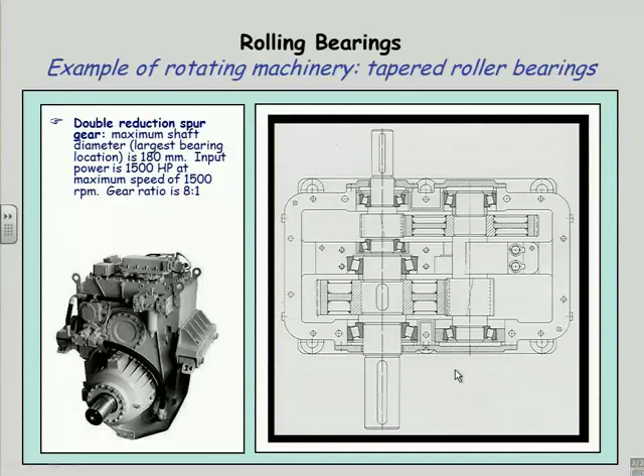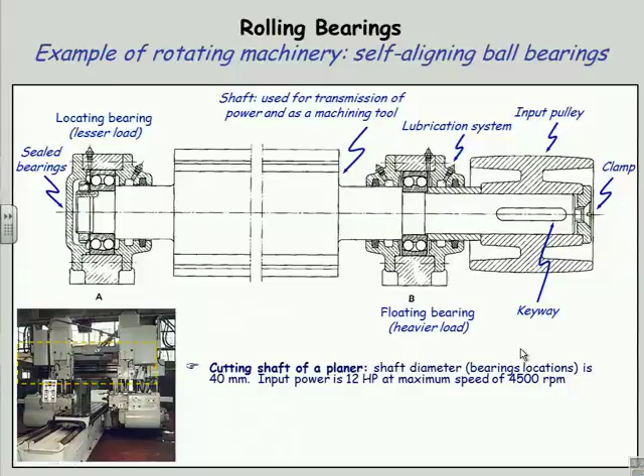So in that respect, they're handy because they're an off-the-shelf item. They're not terribly expensive considering the technology that's involved, because they make them by the millions, and they've invested a lot of machinery in the manufacturing process, so they're fairly inexpensive. They're made by a wide variety of manufacturers all over the world, and they're made to international standards, which means that any manufacturer's bearing of the same category is interchangeable with anybody else's, so you're not locked into any particular manufacturer. Same as with gears.

So ball and roller are the general types, and within those two general categories there's a whole big variety. For example, here we have this category of radial ball bearings, radial meaning that they're going to take radial loads and not very much thrust load, if any. Then there are those that are made specifically to take thrust. Then you have roller types, which can be either radial or thrust or some combination thereof. Here's that tapered roller that will take both side loads, that's thrust loads, and radial loads.

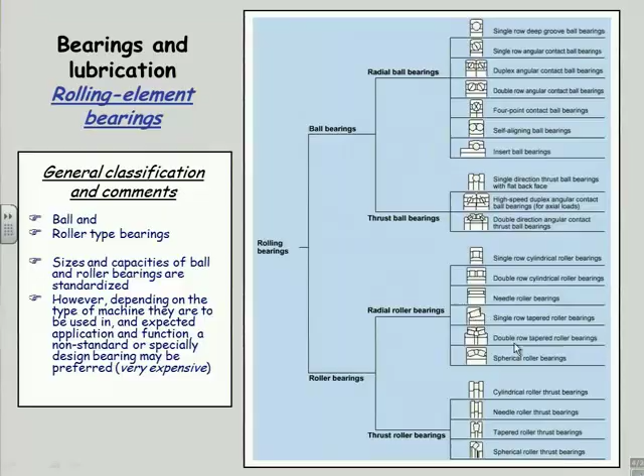So these are some closer views of ball bearings. On the left is a so-called deep groove ball bearing. It's also called a Conrad type. It's the most commonly used. It has the highest speed capability of any of these types of bearings. You'll notice that there are grooves that match the radius of the ball for some portion of it, both on the outer and the inner ring.

Everything here is hardened steel. They use a high chromium steel for both the races and the balls to get good life and handle large loads. These balls are in some kind of a cage that separates them and keeps them located appropriately around the circumference, and the balls do not rub on one another, so there's airspace between the balls maintained by the cage. And because there is this little bit of a wraparound, this bearing can take some thrust load as well as radial, but they're primarily designed for radial load. And they can take thrust in both directions.

The so-called angular contact ball bearing, you'll notice, only has a wraparound on one side of the ball, on this side on the outer ring and the opposite side on the inner ring. So that can obviously only take thrust on the outer ring to the right and not in the other direction. And also, of course, can take radial load. So it says over here, deep groove, which is the one on the left, are selected for radial and moderate thrust or axial load. Angular contact are selected for radial load and larger thrust axial in one direction. So there's more wraparound apparently here on the ball that lets that take a larger thrust load, but only in one direction.

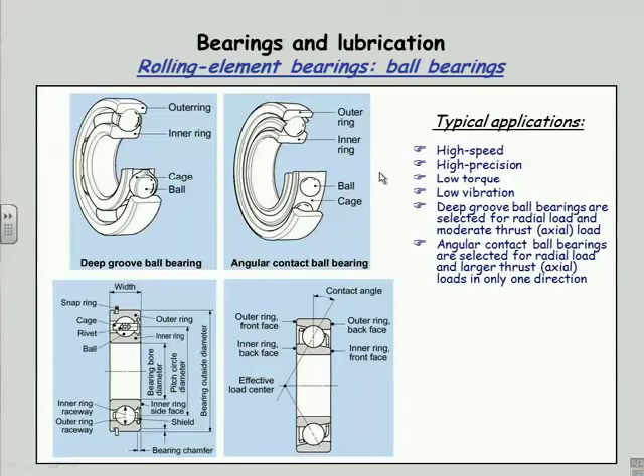Here's the tapered roller again, a conical shaped roller arranged so that it can take both directions of load. Another nice feature of the tapered roller is it's separable. So I can pull it apart and have the outer race in one hand and the inner race in the other. And the rollers will be attached, I think, to the inner race, usually, and the outer race is just the race. Whereas ball bearings, typically, you can't take apart, or you'll ruin them if you do, because they're crimped together. And likewise, this type of spherical roller bearing, you would not be able to disassemble.

So they're made to be pressed on the shaft and into the hole. So the bearings are made with very tight tolerances on the OD and ID, suitable for press fit, which makes them easy to put in and hard to get out, as you might imagine. So quite often you will press only on one or the other, press it on the shaft, and you'll clamp it in. I'll show you some clamping arrangements later on the other side. So I have some means of disassembly for replacement purposes.

This spherical roller will give me some self-alignment capability, which is nice. Most of these bearings will require you to have very accurate alignment of your shaft holes so you don't put side loads on the shaft and bending moments. But there are some, such as this spherical roller, designed so that the outer race can rock with respect to the inner race and self-align. And those are nice because I know I have simple support at the load then, since it can't take a moment, right?

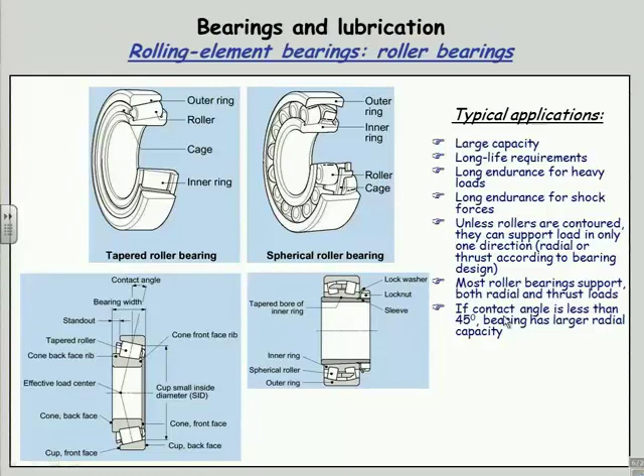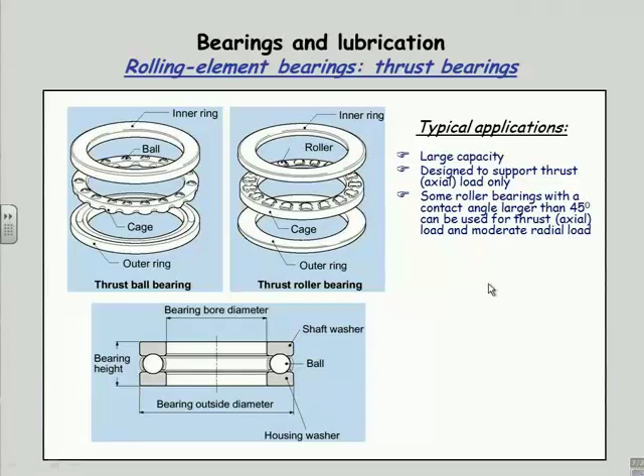Then if I have strictly a thrust load, there are two possibilities here. This shows a ball thrust bearing. Again, the balls are captive in some kind of a container called a cage. And we have an inner and an outer ring, which are really a top and bottom in this case. And this is a roller version of the same thing, a thrust roller bearing. And these will have more friction because, as you can picture, if this is a cylindrical roller, it cannot have zero slip except along one line because I've got a different linear velocity as the radius changes. So there's going to be some sliding going on here, whereas the ball has point contact, so there's less sliding involved there. These will hold very large loads.

So this is a list of pros and cons for rolling versus sliding bearings. There's always a trade-off in some respect. So the rolling have advantage over the ones we talked about the other day, sliding or journal bearings. Very low starting friction. In fact, you're familiar with the Coulomb friction idea that there is a static component of friction that's larger than dynamic, and that's true whenever I have something sliding on something else. So that's a characteristic of a journal bearing. So it takes more torque to start it rolling than to keep it rolling. Whereas a ball type interface or a roller type interface, there's very little difference, almost immeasurable difference between the static and the dynamic friction. So they start up more easily than a sliding type bearing.

Interesting little tidbit as a side note is that around the turn of the 20th century, the late 19th, early 20th century, railroads switched from journal bearings in all the axles of the train cars to ball bearings. And long freight trains that originally required two engines to get them started because of the start friction could then be run with one engine. So it was a huge saving in fuel costs and so forth, and equipment being tied up, if you could run the same length train with one engine as opposed to two, just because they put ball bearings in all the axles.

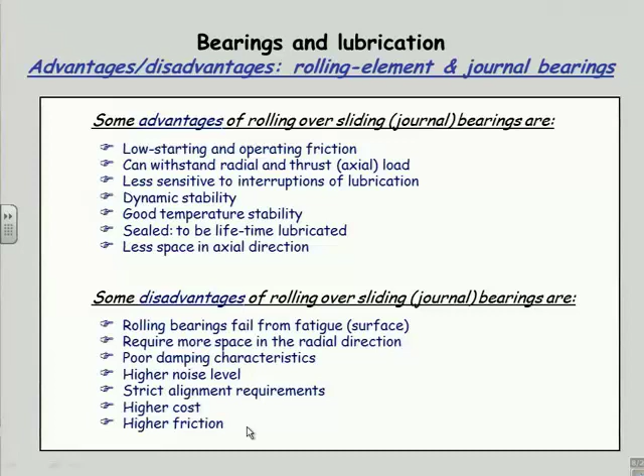Higher cost. It's pretty obvious that a slug of bronze is going to be less expensive than something with a bunch of balls in it. Higher friction. Because when I get up on that oil film, my friction coefficient drops very, very low, even lower than the rolling. We saw some of these in an earlier picture.

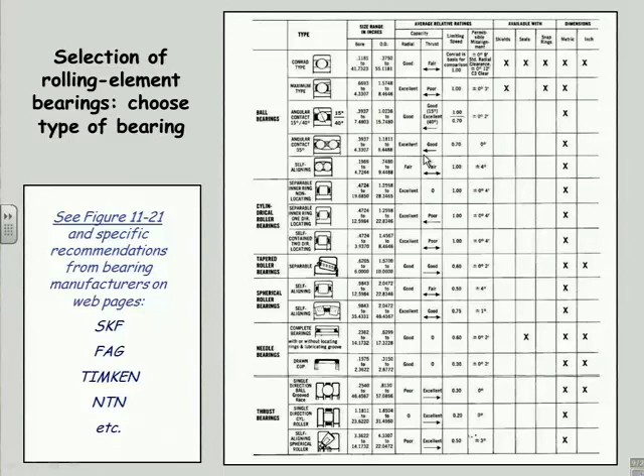This is a catalog page right out of a bearing company's catalog. And here are some of the big manufacturers, SKF. They seem to like initials, FAG, NTN, Timken, and there's a whole bunch more. So you can go to their catalogs, which are now all on web pages, and you can find out all the information you need to specify a bearing. Very rarely, unless you work for a bearing company, will you ever design a bearing. You'll simply select one from the available bearings, and we'll talk a bit today about how to select them properly. It's quite straightforward.

We know that in surface fatigue, it's eventually going to fail. It's only a question of how many cycles it takes to kill it. And this curve shows a statistical distribution, in essence, of the rate at which the bearings will fail in service. It's referred to as a life distribution curve. On the horizontal axis, we see something called relative fatigue life. And the reference life is this so-called L10 life, which is given a value of 1. And for a given bearing, that will be a certain number of cycles under a certain load.

And what it means is that you can expect that 10% of your bearings will fail in that many cycles, whatever this represents in an actual calculation. And 50% of them will fail at, say this turns out to be a year to make it easy to talk about. So say this is a year's worth of running. I'll lose 10% of them. In 5 years, I'll lose 50% because this is fairly linear right here. Then the curve goes nonlinear, so it'll take me 10 years to lose 80% of them, 15 years to lose 90% of them, and 20 years to lose almost all of them, like all but 5% of them, or something like that.

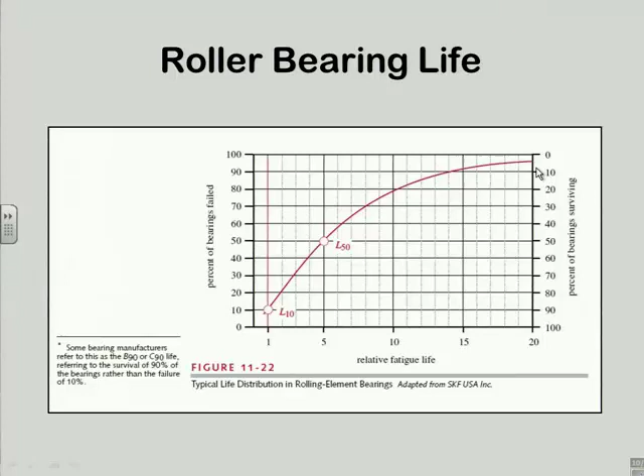So the L10 life numbers are used as the reference, and that's what you'll find in the bearing catalog. And with a very simple formula, we can calculate for our load how many of these L10 lifetimes we should expect. In other words, where are we on this picture here in terms of number of cycles? That's pretty straightforward to do. This is the relationship that's been determined by experimental data done by the bearing companies in large part. And it's slightly different for ball and roller. L in this case is the fatigue life measured in millions of revolutions.

C is a dynamic load rating, which is a number in pounds that is assigned to each bearing based on experiment and testing that they've done. So each different size and type of bearing will have a different number for C. And P is the load that you're going to apply to the bearing, whether it be radial or axial. This allows me to combine the two. So this is the equivalent applied load. And if I have a combination of axial and radial load, then this equation will let me find what P is for the given combination, where FR is the radial load that I'm applying, FA is the thrust load that I'm applying, and these factors X and Y also come out of a chart supplied by the manufacturer along with this factor C.

So I can look up the X, the Y, and the C, and V is the rotation factor, which is 1 if the inner race is turning and something a little bit bigger, I think, if the outer race is turning. So the reference is for inner race to be turning. And that's about it. So I can get a number for P based on my applied loads.

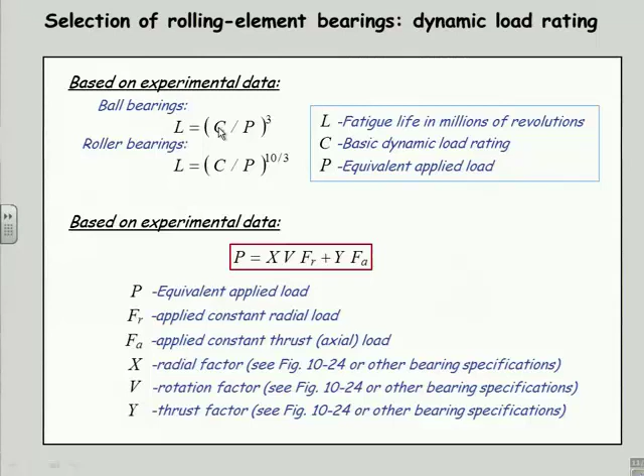Now, fairly recently, I didn't put a year on this, but this is only in, I think, the current revision of the book, so it's only a few years old, ASME and some other researchers have come up with a new standard. It's both an ISO standard and an ASME standard for rolling bearing life. And what's happened is there's been something of a revolution in steel manufacturing over the past couple of decades.

And they've discovered how to make what they call clean steels. And by clean steel, what they mean is they've controlled the process to such a degree that they are keeping the debris, the crud, out of the steel. And it's the non-steel components in the steel, that is pieces of dirt or little gaps, that cause the cracks to begin forming. The cracks will start forming at one of these disruptions.

So if you could somehow make a piece of steel that had no defects and no foreign material in it, then you theoretically would have a much stronger material, and it turns out that you can approach infinite life in surface fatigue with these special clean steels. So, as I underline here, it makes use of the latest empirical data on the surface fatigue strength of bearing steels. And these are being applied particularly to bearings where you're trying to get longer life.

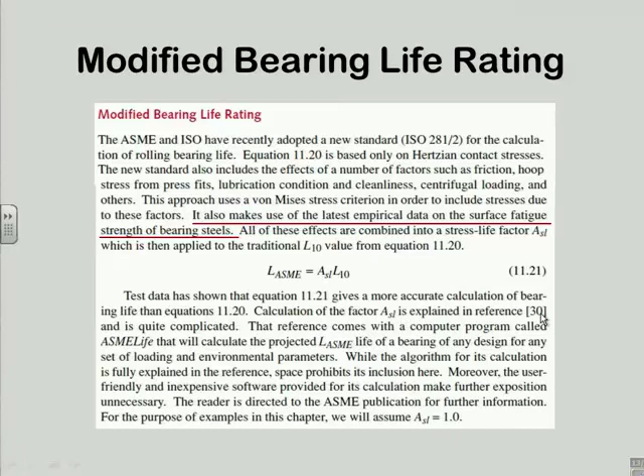And it says here, ASME has published this in the reference that I give you in number 30, and it's a very complicated algorithm, but it comes with a computer program called ASME Life that calculates this number for you for any set of loading and environmental parameters. They explain the algorithm, but it's rather complex, so I didn't even try to include it. But if you get the software package, you don't need the algorithm. So for the purposes of my chapter, I've just considered this factor to be one. And you can go to that reference and pay them a small amount of money and get that program to do more accurate calculations if you would like to do that.

This is an example that I have in the chapter. I'll just walk you through it. It says we want to select a deep groove ball bearing for a certain loading and life. Now in your case for your project, you've got mainly thrust load, I think, right?

You've got the weight of all that stuff sitting on at least one of your two bearings, right, to support the weight of the dial. And you don't have an awful lot of radial load, I don't think, because you're mainly transmitting torque. And unless things are out of balance, which they don't want to be, up top, I should not have an awful lot of side load. So you're really in mainly a thrust situation there.

So I don't think you're going to have any difficulty whatsoever in getting a bearing able to handle this, because your shaft is so big due to the stiffness requirements. It's going to drive you up to a very large bearing, much bigger than you need for the loads that are on the bearing. And you're probably going to have 10 to the 12th cycles kind of life is my prediction when you do these simple calculations. So that's going to be fairly easy for you to deal with. Your main issue is going to be finding a bearing that fits your particular situation for your geometry.

So in this example, I said I'm going to use a deep groove, which may or may not be what you want to use for your situation. There's a stated radial load and a stated axial load and a shaft speed, and the Conrad is specified. Inner ring rotates, and we want to get at least 5 times 10 to the 8th revolutions. So I go into the chart and I pick a bearing to try. And the way I set this example up, this turns out, I think, not to be sufficient, and I have to go back for a second round and try a slightly different bearing.

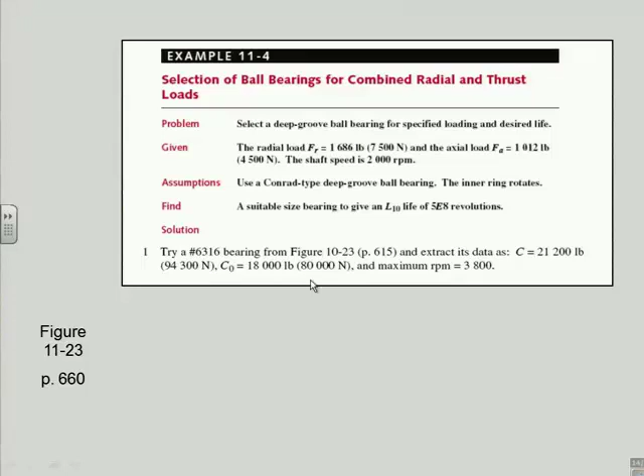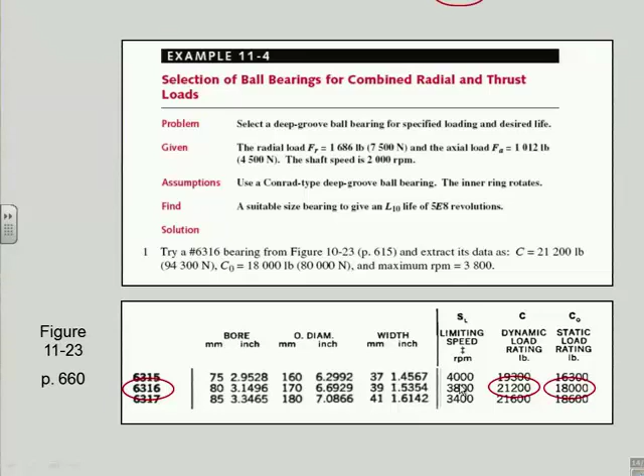And so I get out of that chart, I find its C is 21,200 pounds, and its C0, this is the static load, is 18,000 pounds, and the maximum RPM is 3,800. Well, that's certainly fine because I'm going 2,000. So here's where those numbers are coming from. This is the same chart I just showed you a piece of. So this is a 6316 bearing. There's the dynamic load rating. There's the static load rating. Limiting speed is there.

So I take those numbers to my equation. I want to find out if I have a static problem, so we calculate the ratio of my axial load to the static load rating, C0, and that's 0.056. I go to the figure; this is from an earlier edition when this was chapter 10, so it's really 11.24 now. That's what the notes say. And I pull out a value. So we're looking now at another chart from that same manufacturer's catalog. And we go in and form this ratio, FA over C0. We got the C0 from the other part of the chart. And we calculate that at 0.056. We come in and find that value. And we look over here, and that gives us an eccentricity, an E, of 0.26.

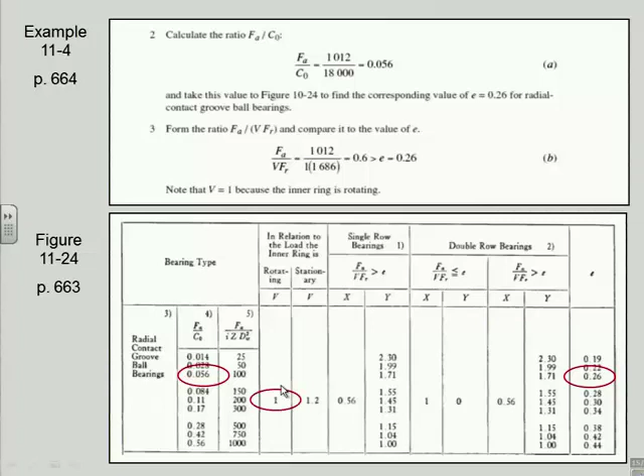And we then compare this number, FA over VFR. This brings in the inner-outer race business. I said inner race was turning, so V is 1. And FR is our radial load. So this is the ratio of the axial to radial load. And these were the numbers that were stated in the problem. And that turns out to be 0.6, and that's bigger than this E factor. And because of that, here's my 1 for V.

Because that's greater than E, I want to extract the X and Y factors from this figure, which are given to me here. There's X, I think, and there's Y up there. This 0.056 applies to all of these values. So I'm getting my X and Y now out of the chart to use to find the equivalent load P, which turns out to be that value. And I use that in the equation, C over P to the third power, and I find I have 5 times 10 to the 2 millions of revs, which is 5e8. So I guess this did come out.

Oh, I say here I did some iteration. I only showed you the last one. But I do remember when I did this, I had to go to the chart a couple of times and try different bearings, which is typical.

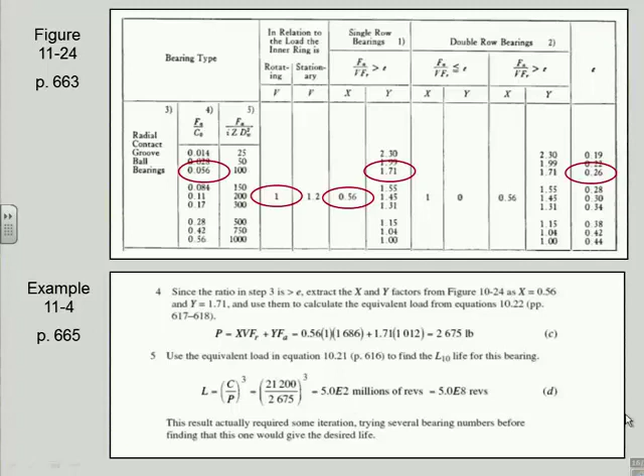So this was my last selection that actually did work and gave me 5 times 10 to the 8th revs. Remember, this number's in millions of revs. So I got 5 times 10 to the 2 times 10 to the 6 gives me the 10 to the 8. All right? That pretty clear?

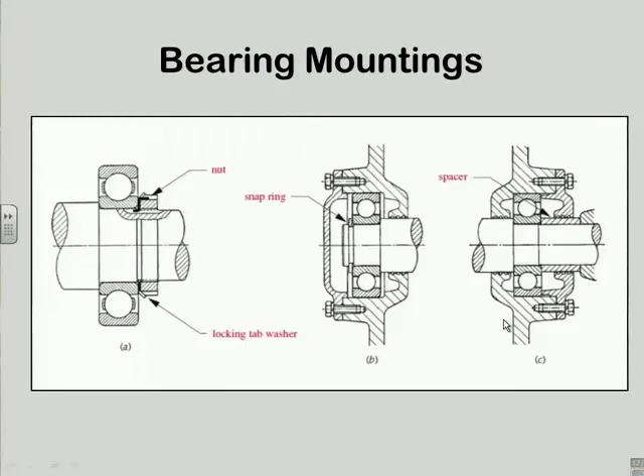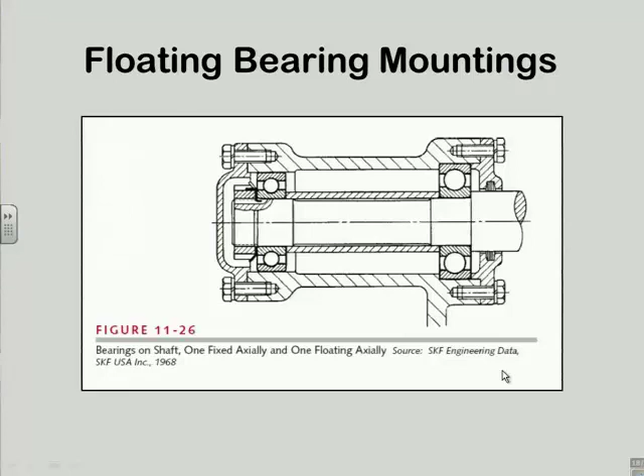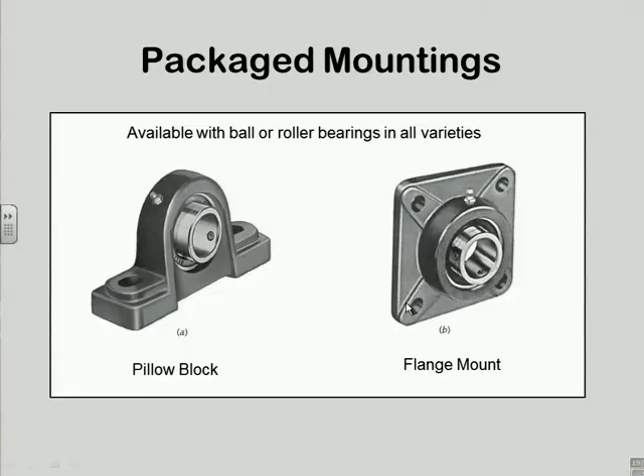It's quite common in machinery to buy a pre-packaged arrangement. This is called a pillow block, and this is a flange mount. And inside each of these is a ball or a roller bearing. You can get almost any type. You can get self-aligning if you want, and they come with a handy mounting kit so I can bolt this down to a horizontal or a vertical surface for that matter. They have a built-in grease fitting for relubricating the bearing, and this bolts up to a sidewall, supports a shaft going through to the other side of the machine or whatever.

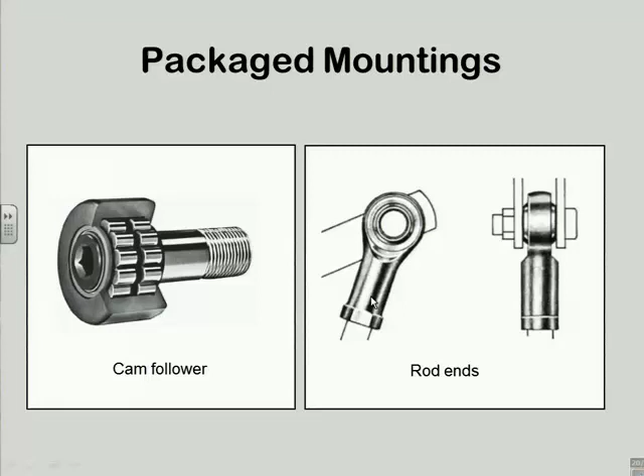Rod ends, purchased parts, are typically a spherical bearing, like a truncated sphere here with a hole in it, and you could put a shoulder screw through for a pin or an actual pin with snap rings. And this is self-aligning, and this end is typically threaded, so I can thread a rod into that, and I can make a link very quickly, and it's even adjustable as to length. Very commonly used in machinery.

So which do I use where and when? One thing to keep in mind is, one thing rolling bearings don't like to do is not go around in full circles. You should not use them when you're oscillating, because in essence you're going to just wear a groove, and the same ball is running against the same piece of race all the time, and they're not going to survive anywhere near the life that's predicted if they're turning continuously. So if I have continuous rotation, then rolling element bearings are okay. But if I have oscillation, then I'm pretty much stuck with journal bearings.

I'm going to have a higher starting torque with journals. I've got to be able to deal with that, provide it in some fashion. If I can't stand that, then the rolling is going to give me a low starting torque. I need lots of lubrication for a journal bearing if I want it to last a long time. Maybe I can't stand to have the oil all over the place or leaking. Now I can get this so-called lifetime lubrication that's trapped within the seals of the bearing.

If I want to float something up on a hydrostatic fluid with air or water, like we discussed the other day, the obvious choice is a journal, which in this case would be probably something flat. Accurate location is easily obtained with rolling bearings. If I need preload, and preload is something that is often used. In fact, the bearings on the shaft that you're designing are actually heavily preloaded, and that's to take out any possible slop in the shaft in any direction, either vertically or sideways.

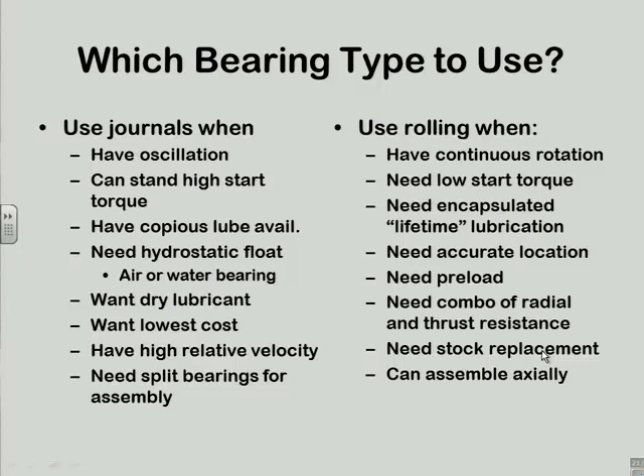And the big advantage here is I can get them off the shelf, and I can stock spares. So if one wears out, I can quickly swap them and keep my machine going so I'm not losing production and so forth. So they're very different animals and have very different applications and very distinct pluses and minuses. And both work very well for whichever situation you find yourself in.

And particularly for rolling bearings, since they are standardized, you typically rely on the manufacturers for advice in selecting them. They don't want you to select the wrong bearing and have it wear out and give them a bad name, so they will, in essence, offer you free engineering help through their sales organization. So you should definitely avail yourselves of that. Even for your project, you can get a phone number off the web, and there's loads of them in this area. Right in Worcester, there's some bearing operations. You can call them up and say, I've got an application, here are my loads, here are my conditions, what kind of bearing do you recommend? And you'll learn a lot from them in a very short time.

And they'll sometimes even do a calculation for you. I want you to do the calculation in this case, but in the real world, when you're under the gun for a deadline, you'll take all the help you can get, right? So if someone's willing to help you do it, fine. I give you the SKF site, and you can find others. We've got some of them on the site, but if you simply Google roller bearings or ball bearings, you're going to get hundreds of them.

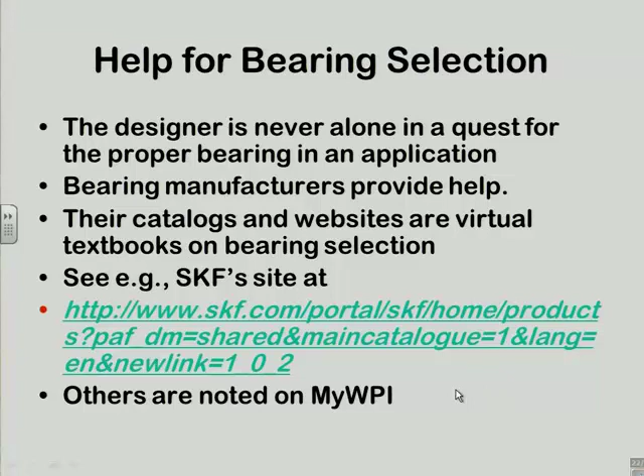Any questions on that? Short lecture. There's not much complication to roller bearings. Questions on the project? Yes, Joe.

The preloading of bearings? Yeah. It's typically done when you want to have very accurate location, particularly in the axial direction. So rather than allow the bearing to be sloppy on the shaft, I'll load it up in one direction. It also takes out any clearance in the bearing. If you think of those angular contact bearings, if I load this one this way, I take all the wiggle out of the ball and the groove. That's really what I'm doing, eliminating all of the possible play, and it's small to begin with.

It's probably a thousandth of an inch that's built into the bearing. And I'm actually potentially reducing the life of the bearing by doing this because I'm increasing the load on it, right? But I'm willing to trade that off for no wiggle. So I have absolutely zero play in the system. And that's the reason it's done in that particular application. They don't want any play in that thing. So it's fairly commonly done.